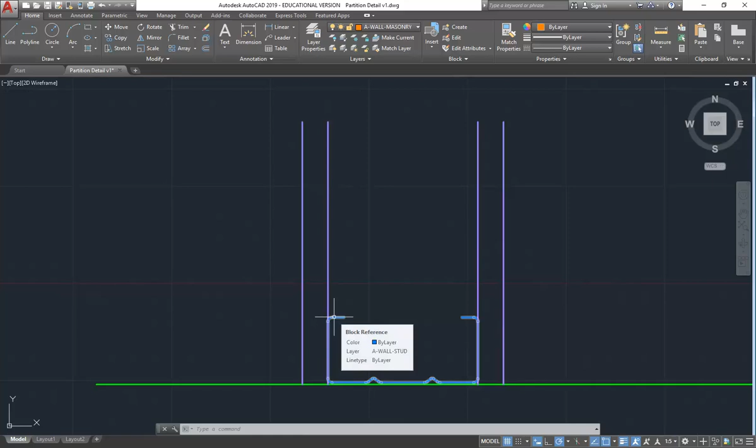Okay, so we'll just finish off this detail with the stud profile you can see there, which is actually our bottom plate, but we're just going to use the same profile for all of those, even though technically that is still importantly called the bottom plate. And you can see there that the stud in elevation is just going to be shown with those circles.

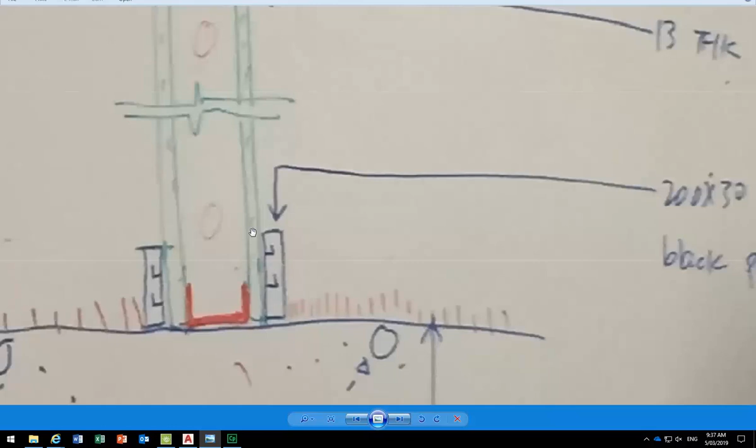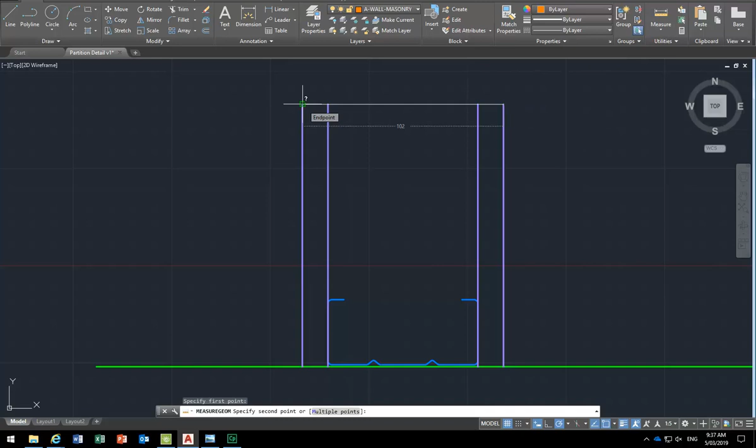So then we've got the skirting duct we need to add, and also the plasterboard that we've added either side. You can see all the sizes over here in that detail. We're going to keep it 13 mil offset either side, and that gives us the total dimension of 102 mil. So then you can see maybe why 100 mil wall is often considered standard, and that's a great thing if you get that measurement.

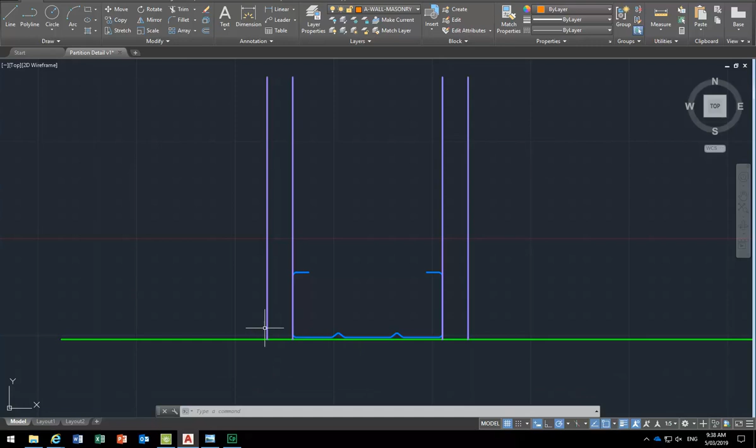Now I might just offset to bring that floor line up and get a slight gap, because you would always need a gap between the plasterboard and the floor. It's an important thing for expansion, and also just for ease of installation, and also to make it read better graphically.

So you can see there, a bit difficult to see, but there is a bottom line there, and it's an arbitrary measurement. You would never take a measurement here, and the builders would probably just leave it done by eye, sitting probably on the slab, but again, there technically would be a gap there, so we'll offset maybe 3 mil, something like that. Could be up to 5, but again, we'll say 3, and that should give us enough for the appearance of that gap.

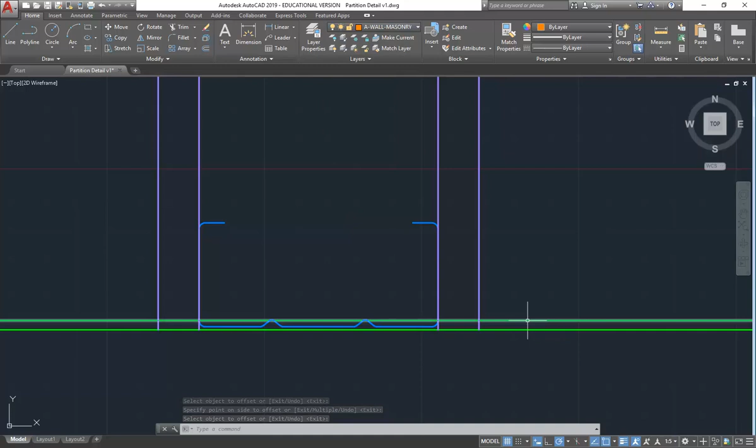And so then I'm just going to put this onto the same layer, and if you've missed the layers I've been making, that's obviously the list, but I might bring up the layer properties so you can see all the settings that I've got there.

You can see that my stud plasterboard layer is quite heavy, but it's not heavy enough. Because this is going to be a detail, I'm going to bring that up to 0.5, and you've always got to vary the line weight. So for details, you generally want heavier lines than in smaller scale drawings. So 1 to 50 drawings would have lighter line weights, and then 1 to 100 would have lighter again.

And then my colours there, they're okay, but then I just want to check my actual stud itself. Oh yeah, it is different, so I just was worried that was the same colour. So that one there, you can see different colour for my stud, and I'm just going to bring that one up as well, make that 0.5. That should make it nice and heavy.

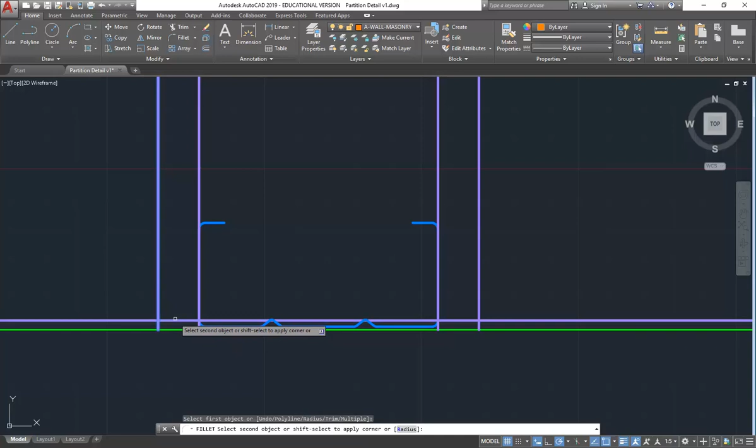There we go. And then of course, just using trim and fillet, we can join those things together. So I might use fillet and check that the radius is 0, and can easily join those lines at the end, filleting the corners. And then I might use trim, and then this time I'm going to pick the 2 inside edges.

Oh, is it crashed, has it? No, no, okay. I'll release it and then try again. Well, I'm going to leave a gap, so I've got a 3 mil gap, that's why I've offset that line up above. So it should be, is it working again now? Yeah. Okay, so I'll just try one last time. And that looks like it's working on the keys again. There you go. Yep, yep.

So now I'm using trim and still selecting my cutting edges at the beginning. And if you still have problems with trim, that's usually the reason, you've got to think about the cutting edges. You can either select them or press enter to make everything an edge. So here, I'm clicking on the things I want to trim. Oh, sorry, I should have pressed enter first, but I'll do that now. And then I click on the bits I want to trim.

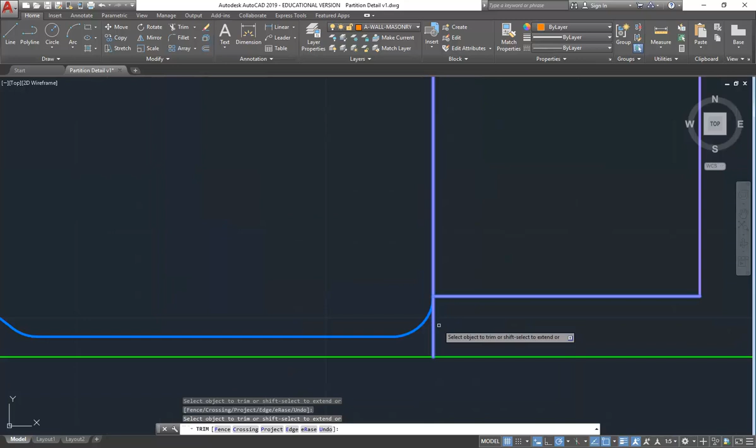And you could technically even put in a gap there, or continue the line down, it's up to you. But technically, it's fine to leave that gap, because that is, again, pretty close to the way it would be built. So I'm happy to do that. And so then the next major part is the duct. But you can see there that my lines for the plasterboard aren't very long.

So I thought that's a good chance to look at the stretch command, which is one that you may not have used very much. And it's a brilliant command, I use it all the time. One of my favourite things in AutoCAD that you don't have in Revit at all.

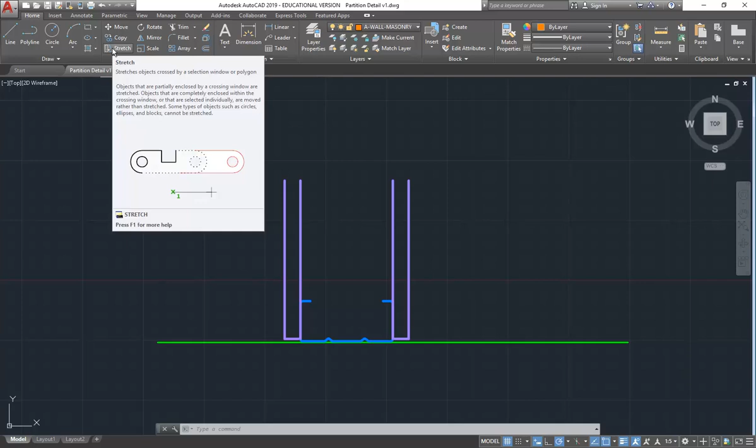There's no equivalent command. So with stretch, the trick is to go right to left. This tests your knowledge of AutoCAD. If you remember, left to right gives you a regular window which selects only the things inside, and that's never going to work with stretch because the object needs to be completely inside your window. So there you can see I want to get just the tops of these lines, but I can't select the lines without selecting the whole line.

But by going right to left, that's a crossing window, and that way I can select the lines. In other words, tell AutoCAD I want to stretch those lines, but only get the ends that I want to move inside my window as well. So that's why you have to go right to left to get that crossing window.

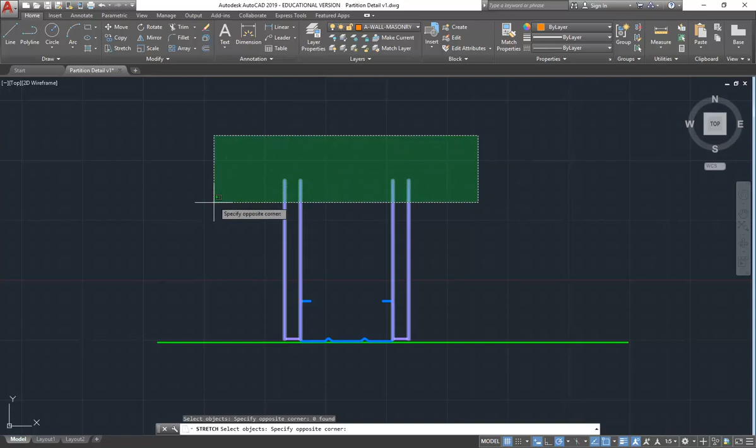If you're one of those people who's thinking ahead and thinking, well, there's going to be a time I want to go left to right and do that to select my endpoints, well, you can. You just need to type C and then enter, and that forces it to do a crossing, even if you go left to right.

So there are lots of other selection options. I won't show you them all, but just so you know, there are about 10 that you can get by typing in options on the command line there to select in different ways. That's just one of them.

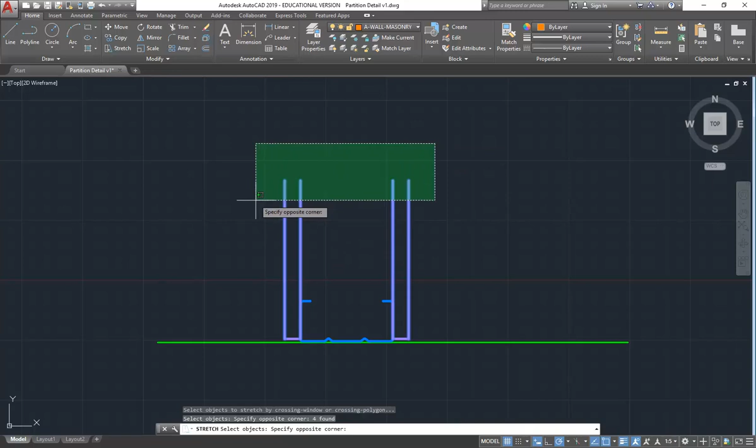So again, you can go left to right, but the easier way when you're using stretch is just to remember right to left to get your crossing, and you'll see it's green with the dashed border. So again, I'll just repeat it: the key is that I'm selecting the objects by crossing over them, but more importantly, getting the endpoints that I want to move inside my boundary.

So then after pressing enter, it'll ask you to choose a base point, and I've clicked just to the side there to do that. And then as you move the cursor, you can see it's stretching those up. That's a great way of extending virtually anything.

So I can do this with my whole, notice how this thing is all below the origin there. So I'll bring the whole thing up again using stretch. So with that, I'll do the bottom part now. Again, right to left, enter, click a base point, and then move the cursor in the direction you want, and it just goes like that.

Great option. And this is why I keep saying that AutoCAD is a brilliant tool for detailing, because you can just knock out line work like this and you've got really good control over it. That in Revit is a bit slower. You just don't have that sort of control.

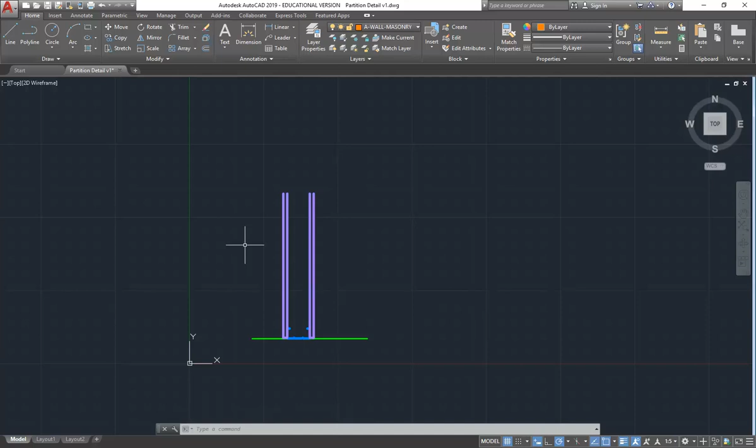Can you stretch to a dimension? Oh yes, you can stretch dimensions, anything, absolutely. If you wanted to say, let's make it a meter, yes you can, absolutely. And that's the great thing in AutoCAD: there's no easy way without using associative dimensions of just typing in the numbers into your dimensions, but you can stretch your objects and the dimensions together, which is something you can't really do in Revit. So that makes it easier when you're making adjustments sometimes as well.

So then again, we've got that now roughly the length I want it, and then we can start looking at the duct. So I'll go and make a layer, and here you could make a layer for your duct, but because I don't want to think too much about having lots of different layers for these things, I'm just going to make a new generic layer, wall metal. Now you could put duct in there, but this could be for lots of other metal components as well.

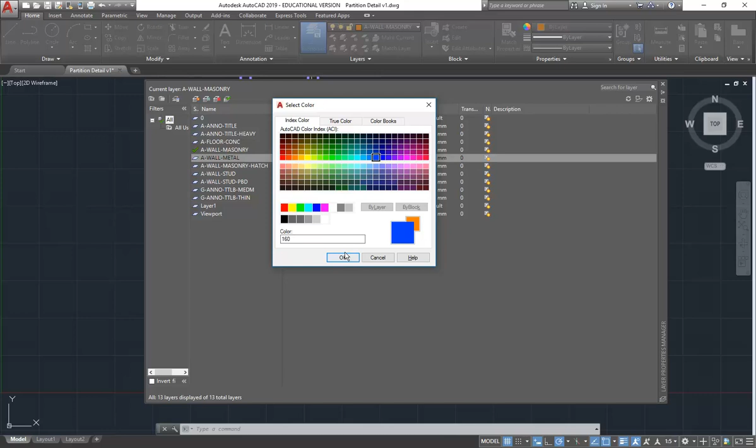We know it's made out of metal, and that's enough for now. So I'll change the colour and just make that the colour of metal, even though the duct probably would be aluminium actually - this is the colour more for steel, but again, I'm just using this for all my metal. So that'll do for now, and then the line weight - I'm going to keep it a bit lighter than my stud because we'll have a few things to see in here. So I'll leave it at 0.35 for now, and everything else on default continuous.

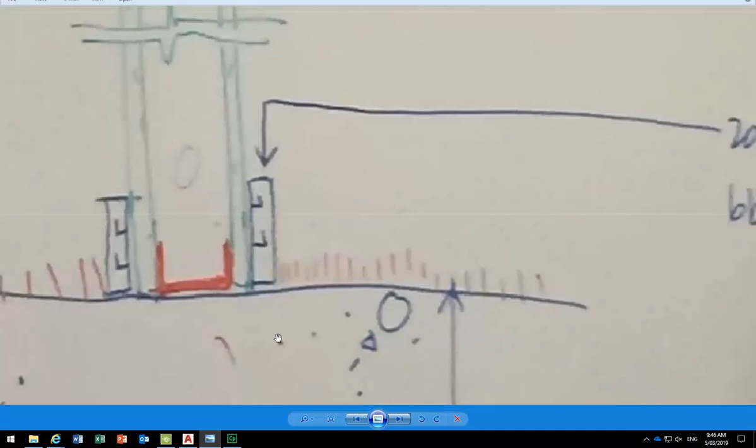Alright, so we've got the duct size, you can see in the detail it's 200 by 30, and that's really the only important dimension there. So again, just drawing a rectangle, maybe off to the side for now, and I'll move it into position afterwards.

So I'll type in size 30, 200, and then, yep, it's big. So these things are, yeah, let's actually, that seems like a big one.

These are not that big, the ones we've got in this room. They'd be more like 150, I'd say, or maybe even less. I'm sure you've all got rulers, you can probably measure it. To me it looks like 150, I'd say even maybe 130 or something. So is it 150? 147. Wow, okay, that's not that good.

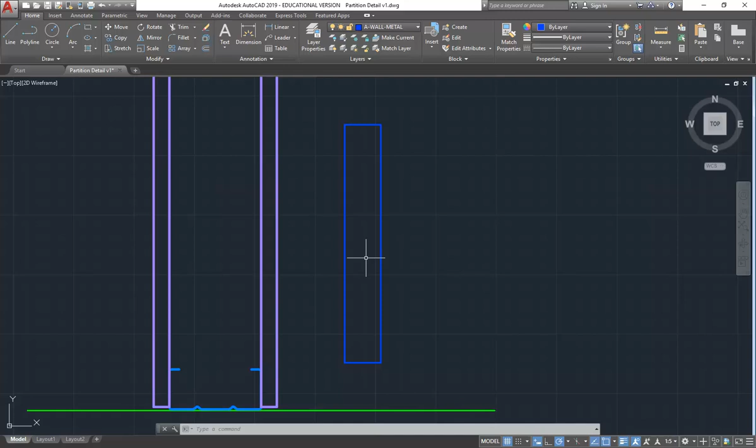Okay, perfect, alright. So that's a pretty decent sized duct, but we'll go with the size John said because that's what he wants. But if you own things, you can use one like that, they're standard everywhere. So you can see in the drawing it's drawn with probably a rounded corner on all the sides, and you can see that's probably the way it's actually built.

So we don't need to put in every single bit of that duct. It's got a cap on the top and the bottom, and I've had to assemble these things when I've done project management for office fit outs. No one wants to do this work, so often the site manager ends up fiddling with these things, and it's not that fun because there are lots of little bits in these ducts. So all I'm saying is you don't have to draw all those little parts as long as you've got the outside dimension, and then we'll draw some of the channels inside.

But I do want to get the rounded corners, so using fillet is a good chance to look at some of the options there. You've got, of course, the radius option, and I'll make it fairly small, so between 3 and 5 - maybe let's say 4. I'm just guessing.

And then I'm going to use the polyline option. So now I can select that rectangle, which is of course a polyline, and it just fillets all 4 corners in one go. Really simple thing, but nice thing to try.

So maybe I want to put the channels in there and have them evenly divided inside that rectangle. So I'm going to draw a line. Now that I've filleted those edges, I can't use that side to measure, so I'm just going to draw a line through the middle, and then use divide.

So that's under the draw panel there. You can of course just type divide, but it's easy to pick from there, that divide button - it's the one with the line with the letter N on it, N for number. So you need to select the object to divide, and that's going to be my line, and then enter the number of segments, and that's going to be 3.

So it has worked, but do you know why you can't see the points? Yeah, well, they're under the line, or they're... kind of, yeah. I mean, that could work, but it's mostly the point style.

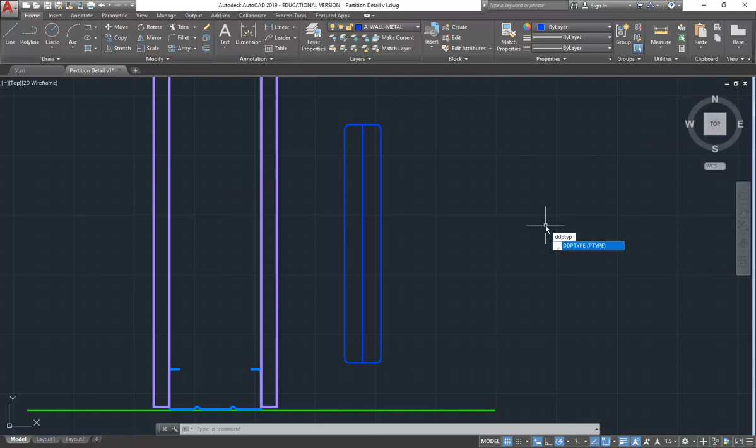So with divide, it uses these things called points in AutoCAD, and you need to have your point style set to show them. It's under utilities here, and you've got that point style option. You can always, if you don't find that, type DDPTYPE at the command line. It's an old thing from the old days of AutoCAD you had to remember, but now under utilities you can go to point style and just choose any that you like the look of. It's not changing the way the point works, just how it shows on the screen.

So now I can see my points. I'm going to draw a line, and you can see there it's snapping to my point. But if you don't see that, check your object snaps - you need to make sure node is ticked. Nodes and points in AutoCAD are the same thing, and that's basically a really good default setting for your object snaps. So I'll leave that one up for a tick because it's good to check that.

Don't leave nearest turned on. You can turn it on or off as you need it, but I generally wouldn't leave that on permanently. But the others are always good. So endpoint, midpoint, center - geometric center can be good, but it can also get in the way. So that's another one I'll just turn on and off as I need it.

Node, quadrant, intersection - again, always on. I generally don't leave extension on, I think it gets in the way as well. Insertion can be good for blocks, but that's arbitrary, it's up to you.

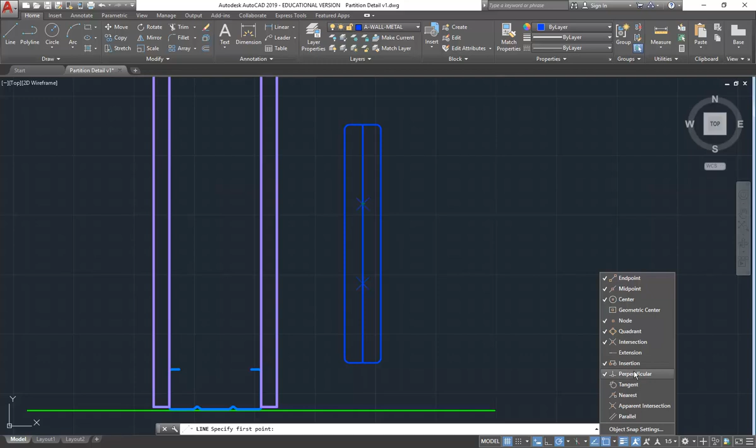And then perpendicular, I think, always on. That's one I've noticed people don't notice or don't remember to leave on, and then can't do all the things that they need to, so that's a really useful one. And that's enough - these others, again, they're useful, but they can get in the way if you leave them on all the time.

And so as long as you've got node though, then you find you can snap to that point, and I'll just take it across to the left, and then draw another line from my node and maybe come up and type in 20.

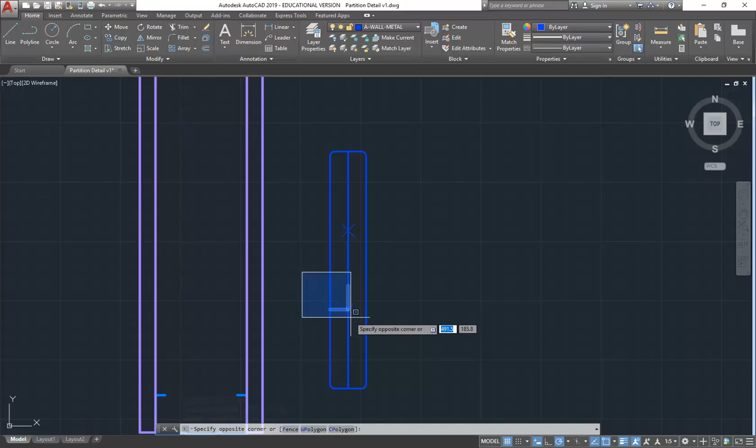That'll do. So I can actually select those lines. Maybe just to make it easier, I'll delete the node, even though you can see if I'm going left to right, it's not that difficult to select the lines without getting the node. But you can delete the node if you want to, it doesn't matter.

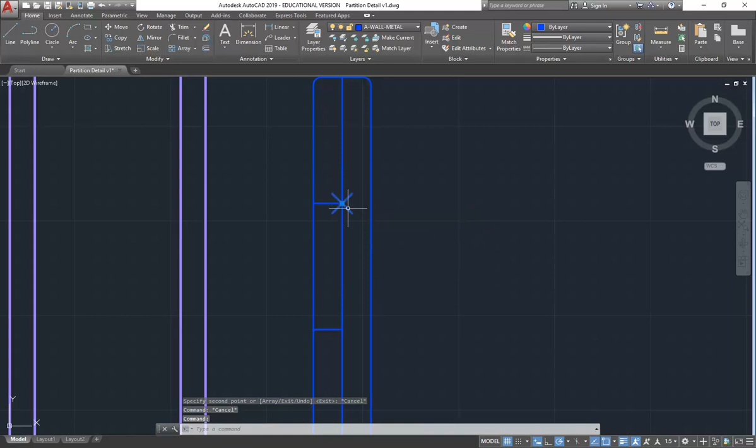So there we go, I've selected the lines and I'll click copy and then just snap to bring that up to the next node, yep. So now I'll delete the other node and my original construction line.

So I can see my little cable trays, is what they are, I suppose. And they're a bit narrow, so I'll just, again, use stretch and go right to left just to get those points that I want.

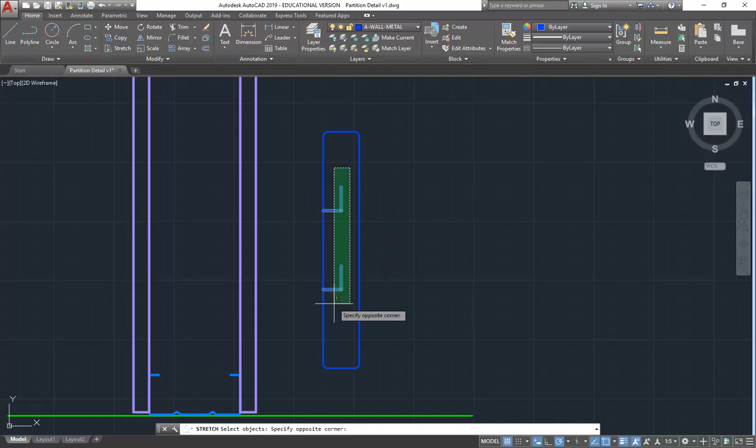Enter, and here I can bring them across, and using the cursor I can see how far I'm moving the cursor. You could even click there - no one's going to take your measurements to build this duct, but if you're fussy, you can type in a measurement like 5 mil to bring them over.

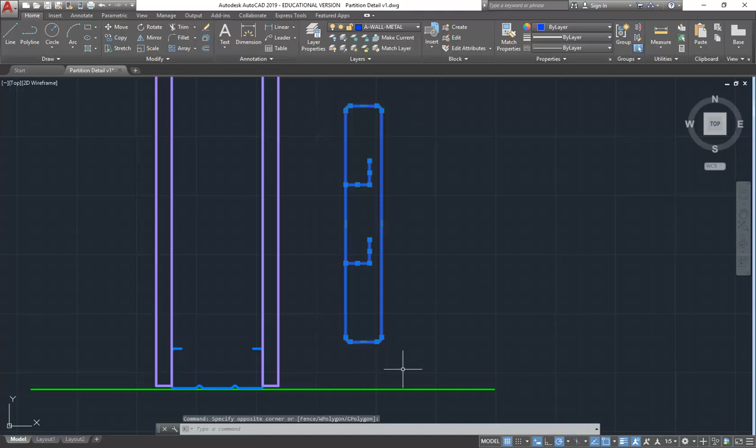And there we are, so we've got a block now for the duct, and also the lines and everything needed for the block, but I've still got to make it, so I'll select that with a window, type the shortcut B, enter to make my block, and we'll call this skirting duct - or just duct, sorry, maybe this should be first, duct skirt, might be enough.

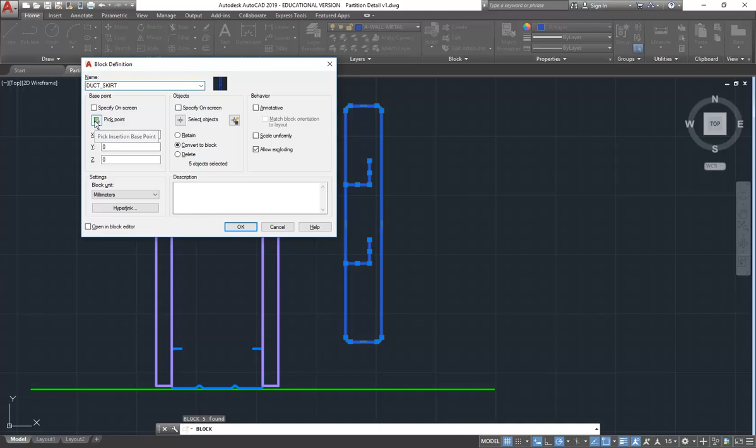And then for the insertion point, click pick point, and here I'm going to zoom right into that corner point. Yeah, and so that's exactly it. So it's really important that you hover on the points, but don't click on them. You're trying to get those little blips to come up, and that is the technical AutoCAD term for those little things.

They're called blips, yep. And yeah, when you've got it tracking - so if you notice you don't get the tracking lines, you've got to check to see that you've got that. They now call it show snapping reference lines, but the old name for it is what you can see underneath it, object snap tracking.

And auto snap is another name for it, or means the same thing. And so as long as you've got that on, you also need object snap to be on - so those two things both have to be on. And then the third thing, it generally works best if you have polar on instead of ortho. So those three things really.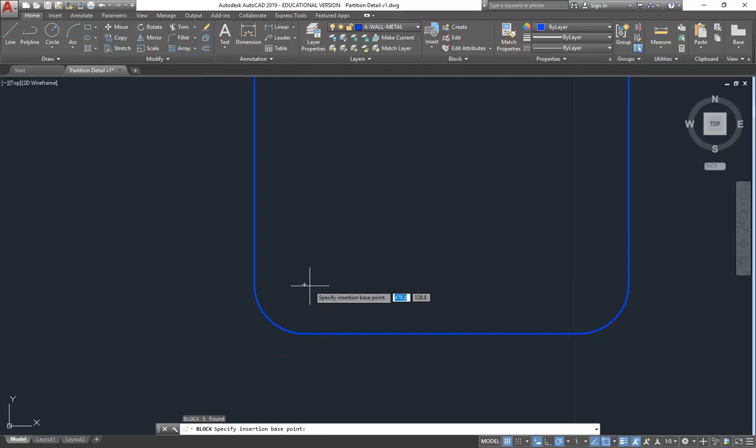And then you should get the tracking lines. But notice how if you go over a point again, that turns the blip off, so it won't track that anymore. Yep, so if you're doing it too much, sometimes you'll take them away. So they might have all gone now, except for the center, and then I can take that away as well.

But I want to bring them back, so I can just go onto these points again, and they come back. I still haven't clicked anywhere, but now when I get the points lined up to project to my base point, then I can click.

So I've got everything that I want. That's why I always remind people with blocks, think about the three things you need. The objects—you're always going to remember that, you've selected the things you want to make into a block. The name—you'll always remember that because it won't let you click OK until you give it a name. But the point is the one that people often forget. If you forget it, it's going to be off to the side wherever your origin was, and it could be 100 metres away. So try to remember that insertion point, it'll make your life easier when you make blocks. It's the hardest thing to fix if you need to go and adjust the block.

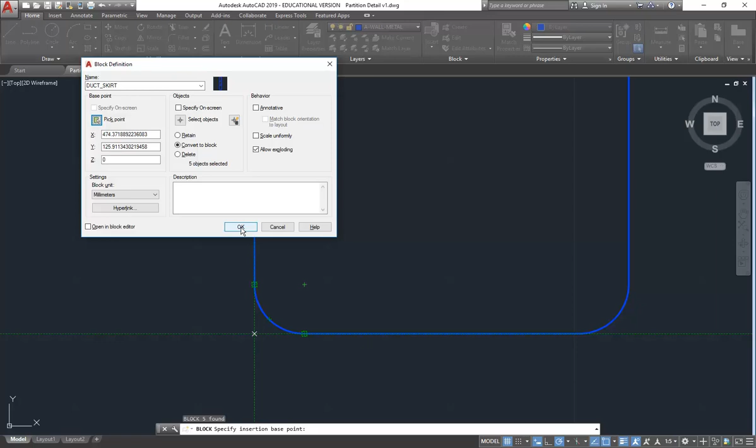So that's done, I'll click OK. And now when I select my object, it's converted into a block. I could move that, but I'm going to just practice and go over inserting the block again. So going to here, I can go to insert and then find the duct now in my list of my own blocks.

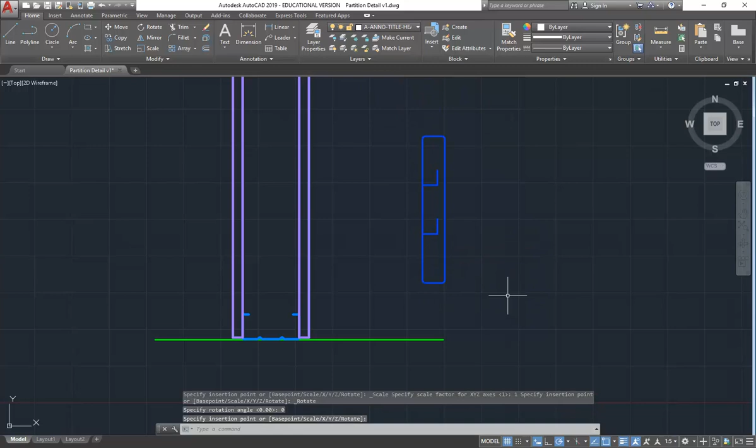But notice I'm on the layer that the skirting should go onto. So that's another thing with blocks, because you can make things within a block—like the lines you can see there, they're still blue. So even though I've changed to a different layer, they haven't changed appearance. You might think, well then why does it really matter which layer I've inserted the block on? The problem is that it can affect the way the block behaves, and so there you can see it's on this layer, and I've turned that layer off, but it's still visible.

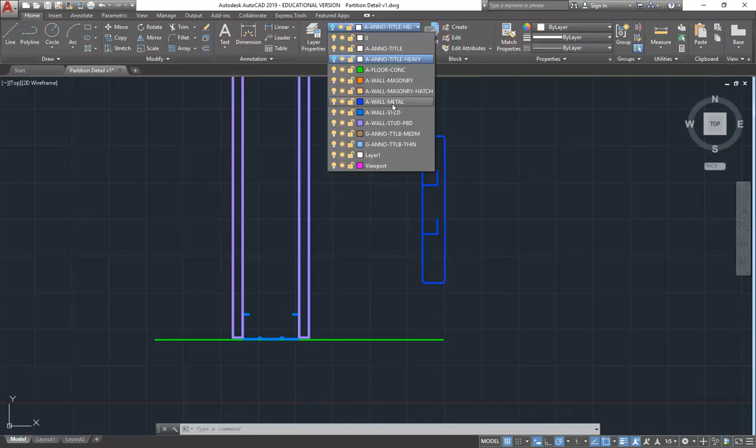And that's because again, the lines are on the layer that they were drawn on. But if I select that block and then look at it in properties, you'll see it is on that layer. So it can get really confusing. So it's just good practice to try and keep the blocks on the layer that they should be on.

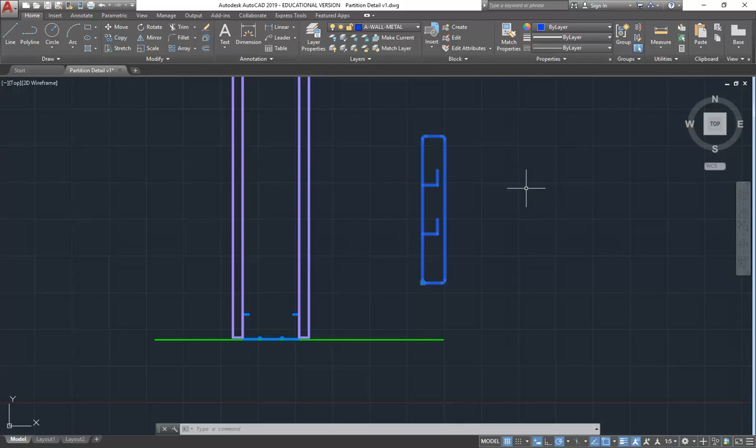And I'll show you some tricks if you want to be able to change the colours of things by changing the layer—when they're part of a block, you can do that. We'll look at that later. So for now, again, I've got it on the right layer. I'm going to change back to that layer as well. And I'll insert again.

So again, I'll use that method of object tracking. And now you've got to think about how this would be built. So when they're building the wall, when do you think they'll put the skirting duct on? Generally, yes—well, often yes, they can put the skirting on after the carpet. In this case, yeah, it probably would be actually. Yeah, and it's good practice.

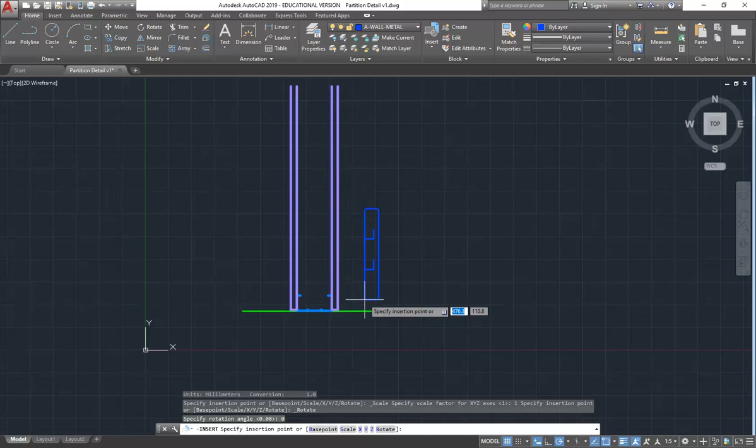It's a neater detail, but it can be done either way because sometimes the carpet—like you can see here—has obviously been put in after the skirting, and that's common as well. So it can be either way. But yeah, in general, if you can put the skirting—the whole point of it is that it's meant to cover up those joints. That's the general purpose of skirting.

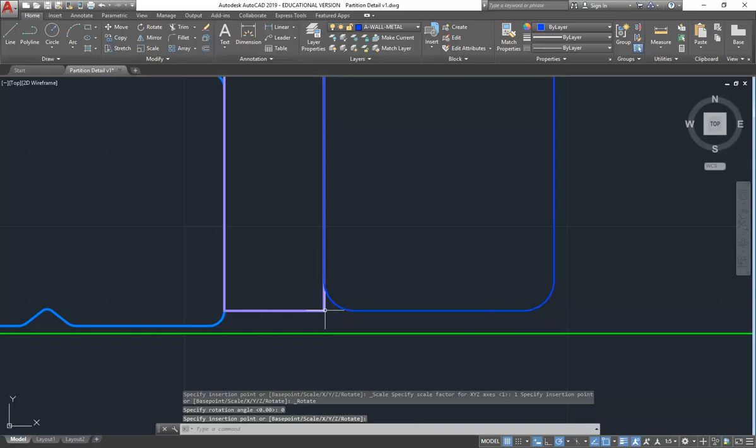So if you can get it to go above your carpet, that's good. But also just leave a gap. So there, we can even snap to this point and leave a gap for now, and you can bring that up and down as you need to. You can see there that John's got the carpet. He hasn't really made it clear, but we'll see if we can get some other details and look at how the carpet can be done. And the underlay as well needs to be drawn as well, with the carpet.

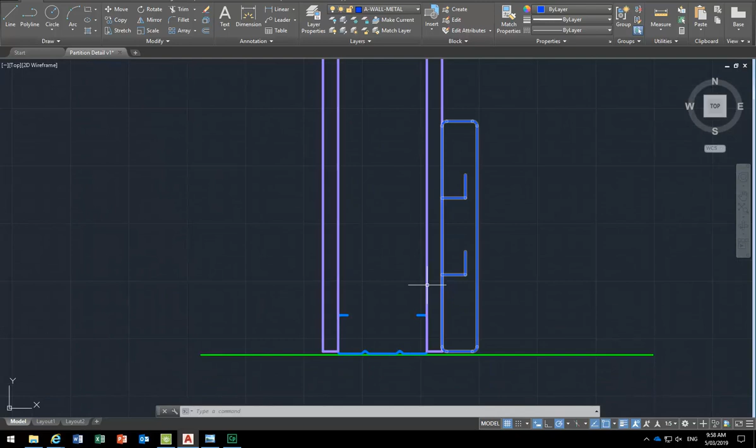Otherwise though, yeah, so you can adjust the position of the duct, but for now, that's good enough. And then mirror. So selecting the duct, you can just click the mirror button and then use the midpoint of your stud or something like that. That's fairly straightforward.

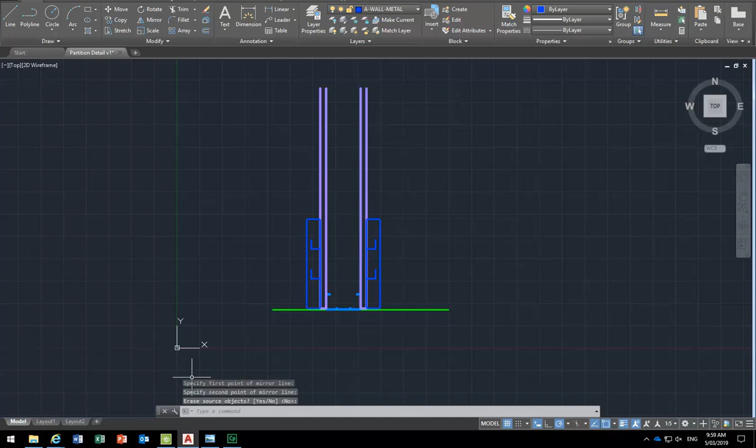And then for the—I should know the names of these things, but I always forget—the circles that you have that show the stud, you can just draw circles, and there is a name for them. Yeah. But all those different parts that you wouldn't believe have a name, and there's a reason for those things, and I've just totally forgotten.

So now we need another layer. We've got a layer for the—and this is really good because you've got the stud layer—and I might actually go and call that wall stud metal, just so that it's clear what it is. And then we need another layer because this is the wall stud metal. Well, what do you think is going to come next?

I'm going to add something now to this layer name to make it clearer what this is. That's the next thing I'm going to do. But this is for the layer that I've already done, the layer for the stud that we can see.

What's happening with that stud? How are we seeing it in section? It's been cut, that's exactly it, so that's what's going there. Sometimes it's just the obvious thing. That stud is obviously shown with a heavy line to show it's been cut.

So now we need to have a layer for the parts of the stud or the framing that isn't being cut. So, a wall stud, metal - I probably don't need the metal, but it's just to make it clear what the material is. And then projection. Sometimes people put just E for elevation, but I like to put projection because then you can use it for your plans and other drawings where you're going to have projection lines.

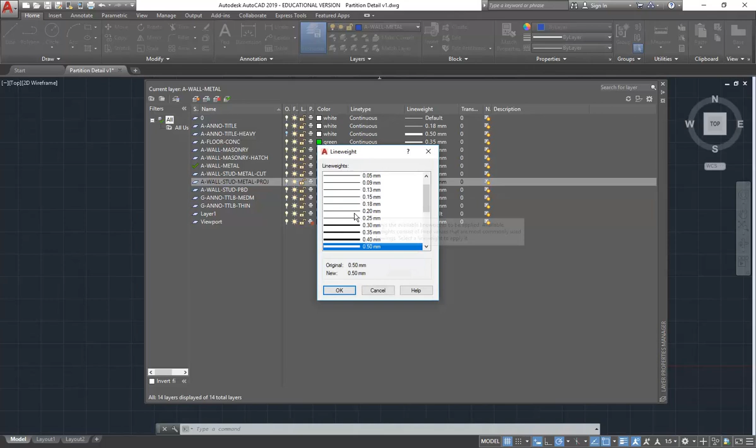Oh, so it's not going to be dashed. I don't know why that went dashed. No, they shouldn't be - I think I was just doing that as an example to show people other things. There's no dashed yet, so I should have noticed that.

And then the colour, again, it's up to you, but I'm going to make it a lighter colour just so that it reads well on the screen. But the important thing is the line weight.

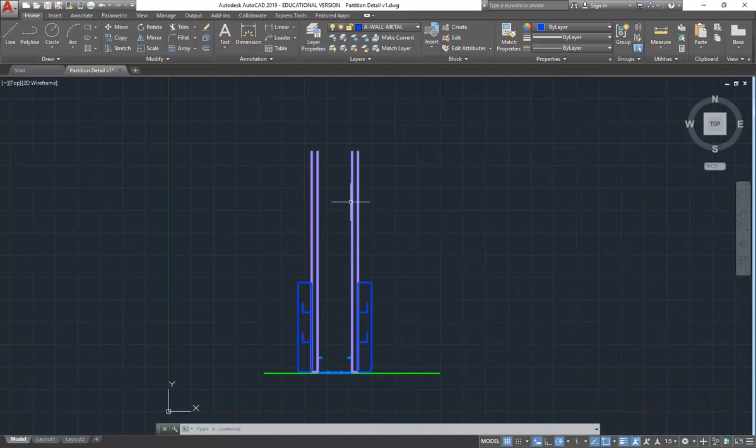So then I'm just going to guess where the circle goes. I'm not really sure, so I'm going to draw a circle maybe just over the midpoint of this stud, by eye. And I didn't change my current layer, did I? So I'm going to change it to the projection one, that's it, yeah.

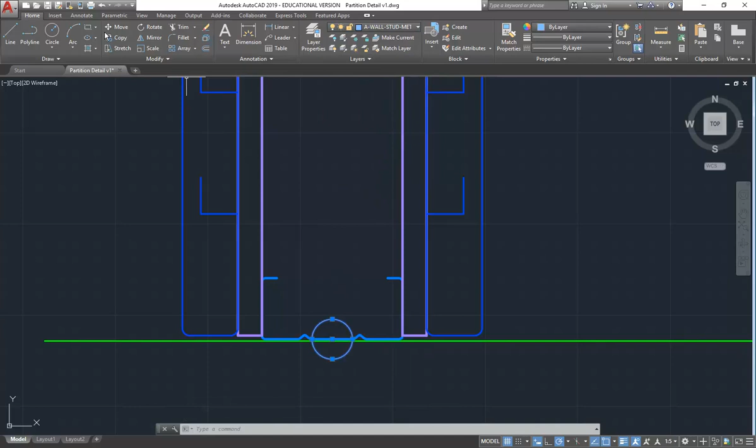I just drew the size by eye, but I might adjust that after I bring this up, because that's too small. So a good thing to remember, you can always double click on things in AutoCAD now to get the quick properties and change it that way. But if you want the full properties, you can select it and then right click and go to properties.

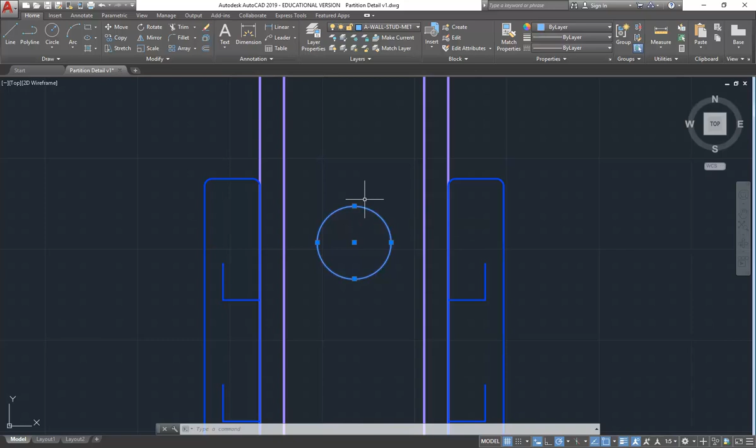I did 20mm radius. That's maybe a little bit too big, so I think maybe 17 looks about right. Yeah, that's better. I know I'm getting fussy, but I think that's about right. Again, this is fairly arbitrary, something like that.

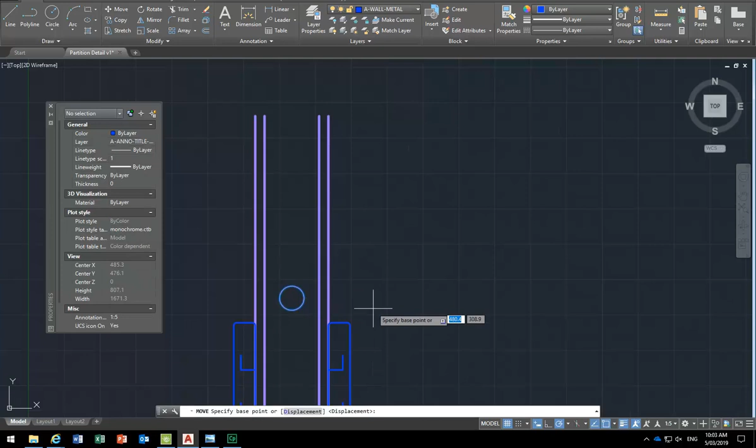Do you want to go and look at the studs and actually figure out how high up the holes are? No - when they make it, they'll have those circles cut into it in the profile. Yeah, I think it is mostly for, yeah, it's per cable.

I suppose there would be about that spacing, yeah. Just trying to think, in the CSR catalogue it'll probably tell us. You should have a copy of that - if you go to the folder here, I'm pretty sure I put one there. There we are, Gyprock catalogue.

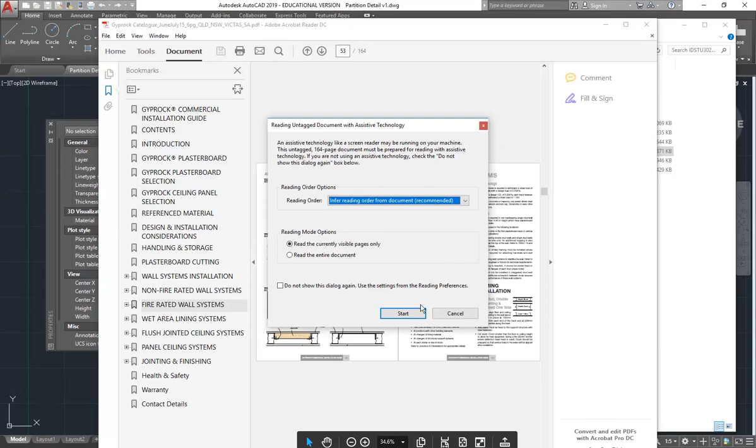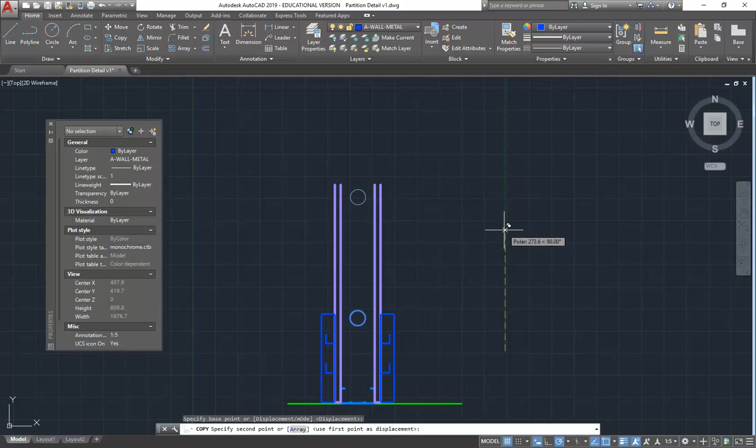There we are, so you can even see them there. I don't think we're going to get a second one in there. They look like they're about 600 apart, and I haven't got enough there at the moment. So maybe I'll bring this one down a little bit and then copy it up 600. Yep, there we are, so that's 600.

And then I can just extend the wall again using stretch. Should be fine. Yeah, that'll do.

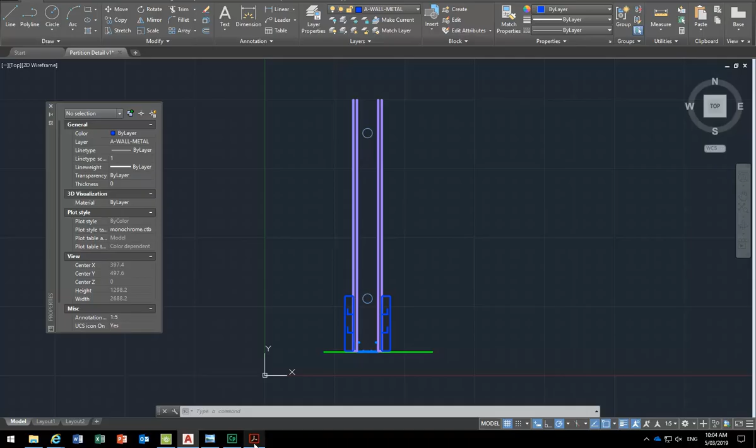Oh, from anywhere, because, yeah, just as long as the circles are 600 apart. And that's just a guess, though - it's really just to get the look of it, because they're not going to make these differently because you've drawn it differently. Maybe that's even too far.

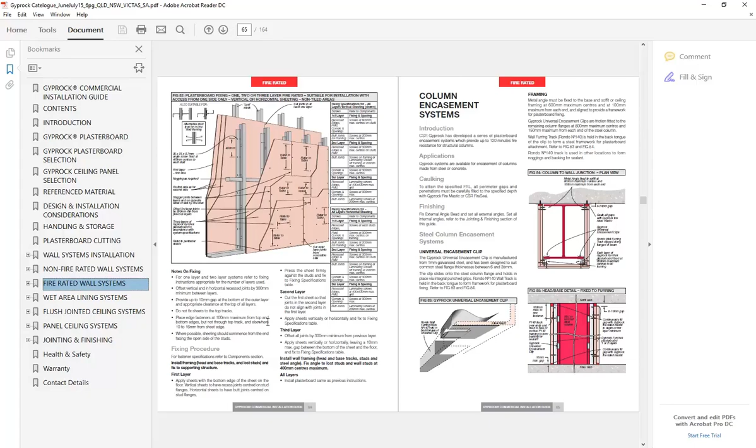So you could bring it down more, but again, just look at these drawings. That's probably right, yeah, that's a pretty standard measurement. If you look through the catalogue, it'll give you the spacing of them if you want to find that out.

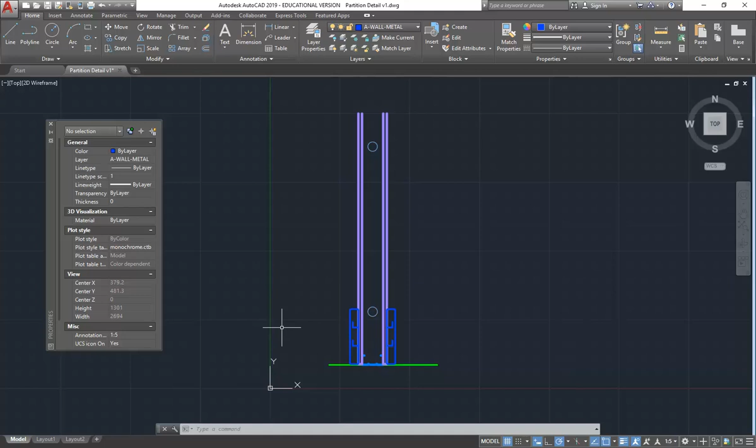But I think that's probably enough for that detail. And then all you've got to look at for the next one is the insulation. So if you know about the batting line type, that's sometimes a good option, but I'm going to show you how you can use splines to get something that won't change with your scale. I've probably gone too long, so give some time to maybe get those things done, and then we'll have a look at the insulation after.